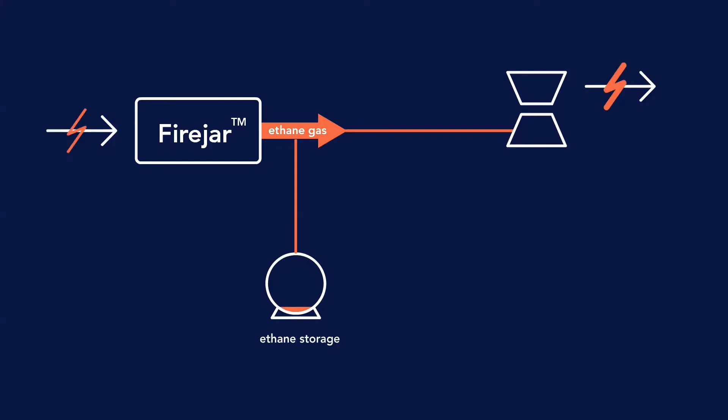The GridThink Firejar Development Center in Cheyenne, Wyoming is a state-of-the-art engineering facility fully equipped for P2G pilot process development. Conventional energy storage systems are episodic in nature; when a battery gets full, it must be discharged before any additional energy can be stored. Our Firejar process stores electricity in the chemical energy of ethane gas, allowing storage and recovery to occur independently and without the capacity limitations of conventional methods. The ethane can be stored indefinitely and is also useful for mobility and heating applications.

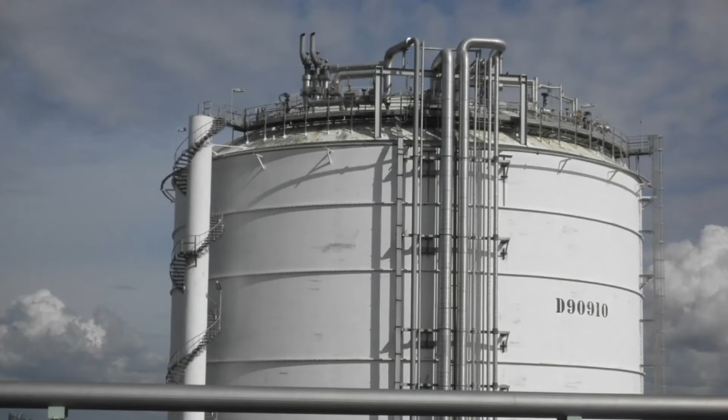Storing ethane is easier than storing natural gas. No cryogenic handling is needed with ethane gas, which is easily liquefied at room temperature at 50 bar. Ethane handling and storage equipment is readily available. Stored energy is recovered as electric power by burning ethane in combined cycle turbines. Firejar technology offers unmatched round-trip efficiency, achieving over

150%. Energy stored in ethane is versatile and can be used as a fuel for land and marine transportation. Ethane can also be used as a heating gas, either alone or mixed with natural gas. Ethane is a perfect P2G product, with 1.8 times more volumetric energy density than natural gas.

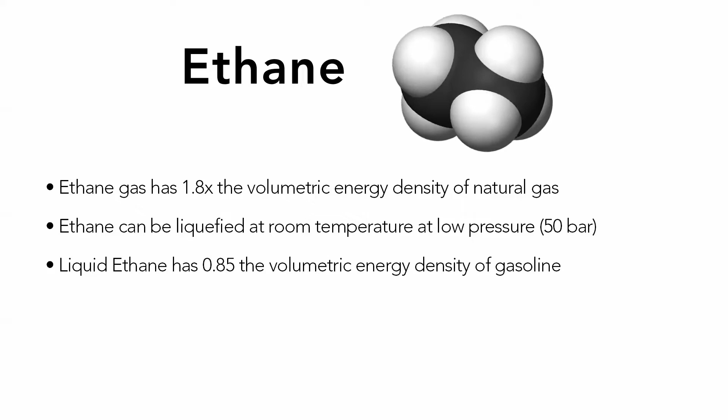Ethane is easy to liquefy and can be stored at room temperature at 50 bar pressure, with no need for cryogenic equipment. Liquid ethane has 85% of the volumetric energy density of gasoline. By using ethane, the Firejar P2G technology can provide over 150% round-trip efficiency for energy storage. Ethane provides a crossover to the chemicals industry because it is an important feedstock for industrial chemicals such as ethylene.

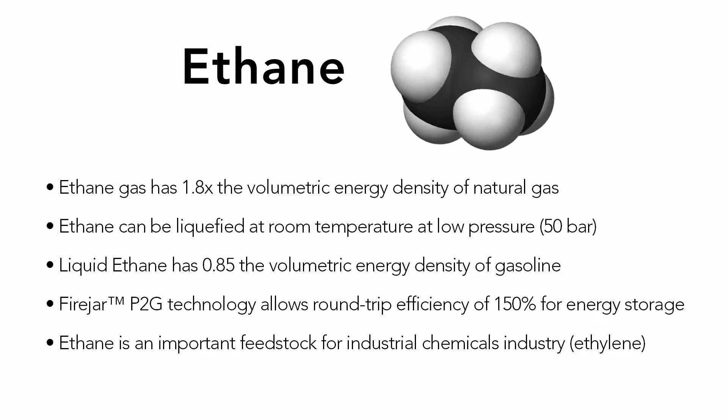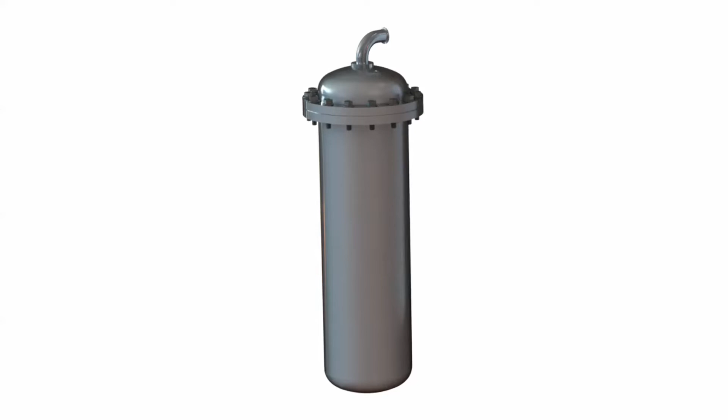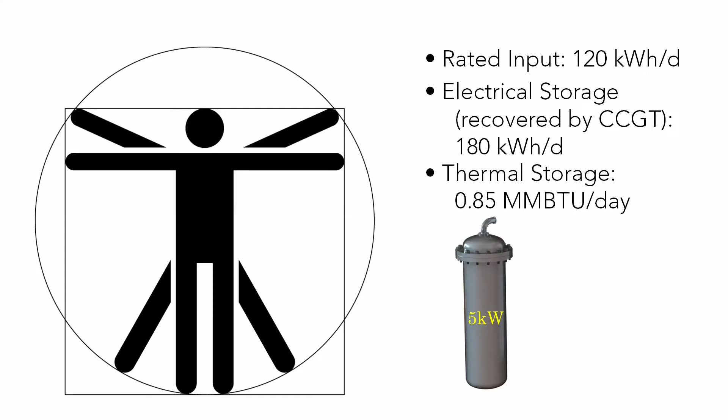The GridThink Firejar P2G technology uses modules rated according to nominal power input. GTI's current Firejar module is rated at 5 kilowatts, and many modules can be used together. This module is compact and easily handled. Each 5 kilowatt Firejar module can store at least 0.85 MMBTU per day in the form of ethane gas. GridThink is currently designing a larger 50 kilowatt module that will be able to store at least 8.5 MMBTU per day as ethane gas.

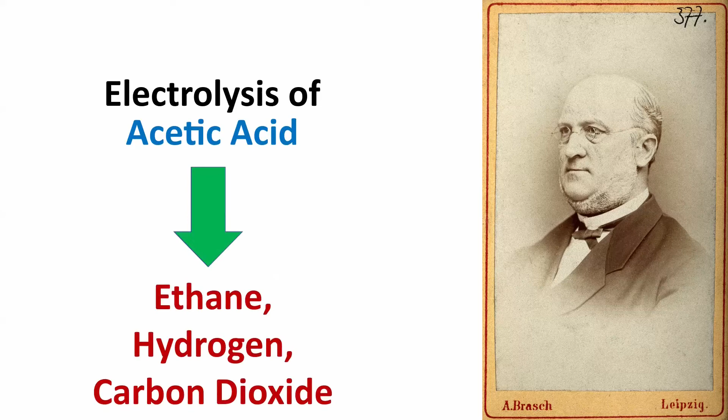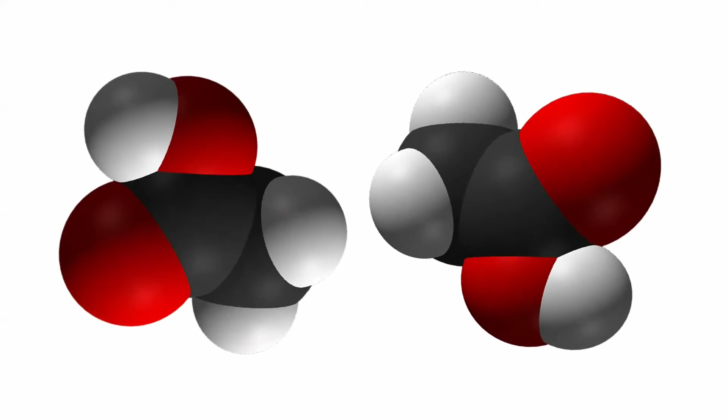The electrochemical production of ethane was first observed in 1834 by Michael Faraday, who used potassium acetate and a battery. The electrochemistry was more thoroughly studied by Hermann Kolbe starting in 1849. Kolbe was able to use acetic acid to produce ethane, and this electrochemical process is named after him. Acetic acid is a common industrial chemical. In the Kolbe reaction, 2 acetic acid molecules are electrochemically transformed into ethane, hydrogen, and 2 molecules of carbon dioxide.

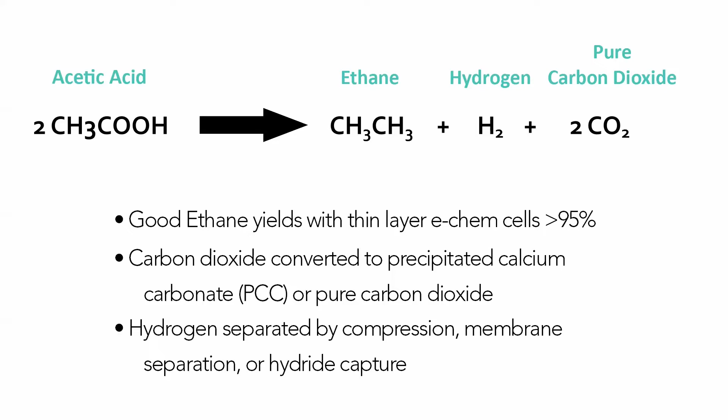The yields of ethane are very high, usually over 95%. Carbon dioxide can be captured as a high-value chemical product called PCC, or as a pure gas. Hydrogen is separated in most cases by normal methods and can be used as a fuel or sold as an industrial chemical. Existing power-to-gas technologies suffer from low efficiency, as much of the energy is lost before gas ever reaches the turbine.

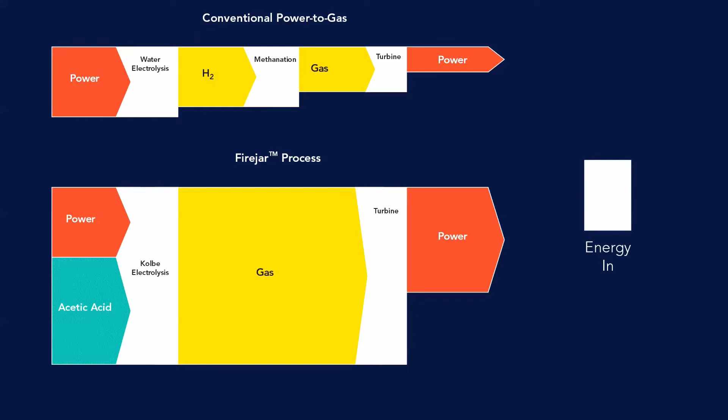The Firejar process works by using chemical energy to enhance the incoming electrical energy. The result is that instead of returning just one third of the stored energy, we amplify it and return 150%.

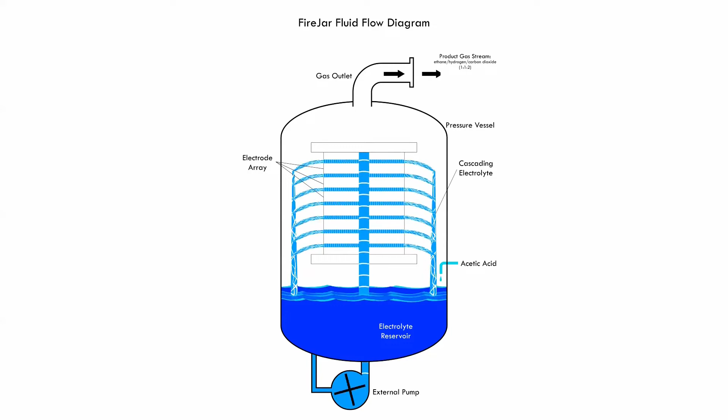GridThink Firejar technology uses an array of electrodes inside a pressure vessel to allow high power operation. Electrolyte containing acetic acid is recirculated from a reservoir over the electrode array, where it is converted into product gases and cascades back into the reservoir. The product gases collect in the headspace of the reactor vessel and leave through a pipe as a product gas stream containing ethane, hydrogen, and carbon dioxide. The process is continuous, with more acetic acid being added as it is consumed.

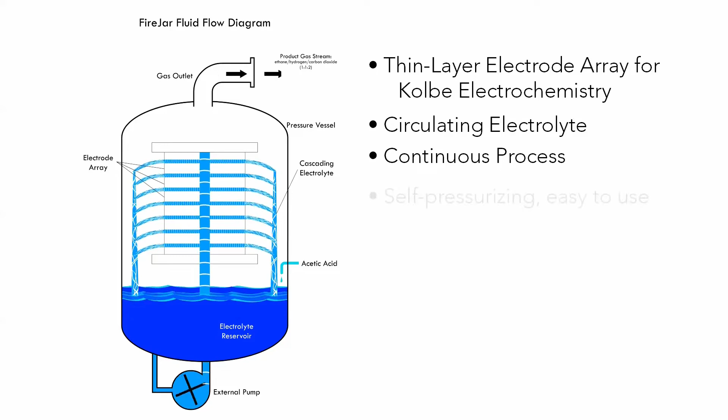The product gas stream is treated by an external physical plant. The Firejar can operate under pressure depending on the requirements of the external physical plant. For example, if a Benfield process is used to remove carbon dioxide, the best operating pressure is 20 bar.

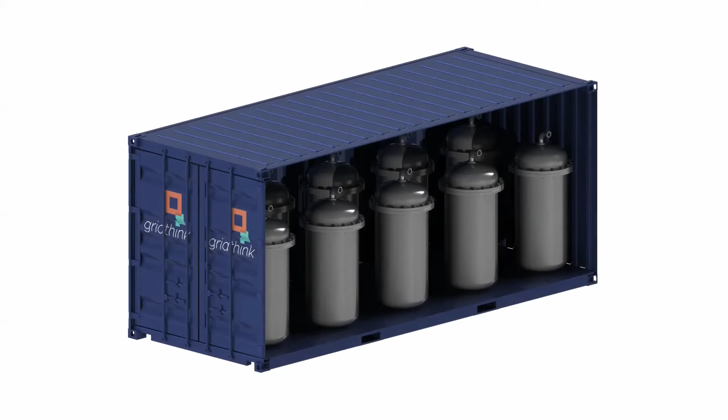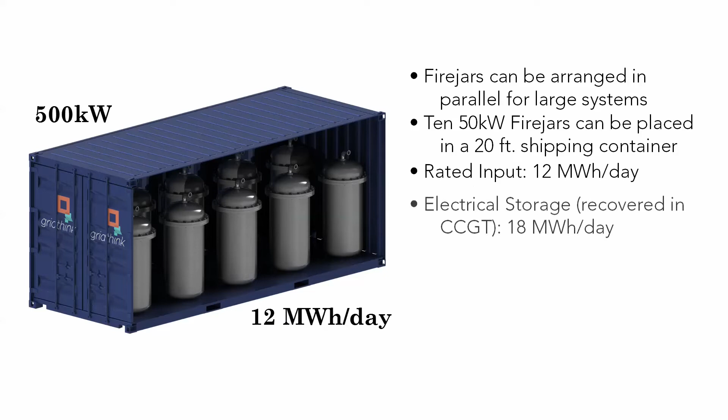Because the Firejar equipment is modular, it can be housed in convenient formats such as shipping containers. A 20-foot shipping container will hold 10 50-kilowatt Firejar modules, with a nominal electric power rating of 500 kilowatts. This shipping container can process 12 megawatt hours of electrical energy per day, producing 85 MMBTU of ethane per day.

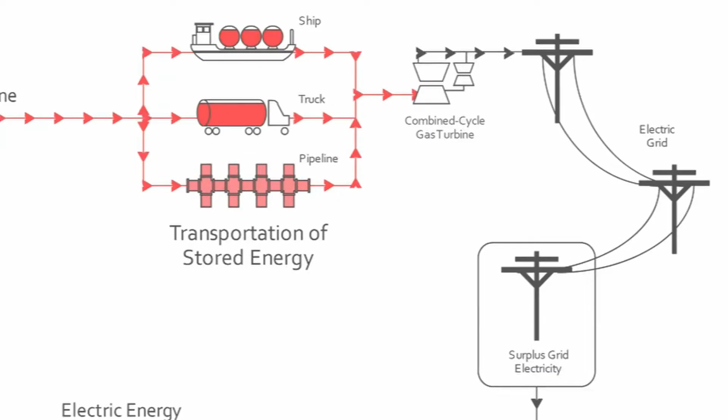GridThink's FireJar is the centerpiece of an economic ecosystem that coherently links several different markets and supply chains together. Elements of this ecosystem include transportation and distribution, renewables integration, chemicals production, and a supply chain that eliminates the need for imported carbon sources. Ethane produced by the FireJar is easily stored because it liquefies at room temperature.

Ethane can be transported as a gas or liquid in pipelines. Stored energy in liquid ethane also can be transported by ship and marine transport, by tank truck or ISO container, or by tank cars on trains.

Once the energy stored in ethane gas reaches its final destination, it can be recovered as heat or burned in a combined cycle turbine with 150% round-trip efficiency.

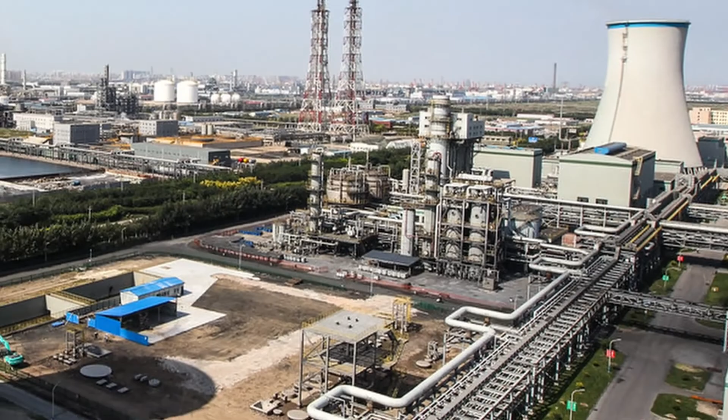The FireJar process is very clean. There are no NOx or SOx pollutants nor particulates produced. Recovering the stored energy by burning ethane is also a very clean process, producing only carbon dioxide and water.

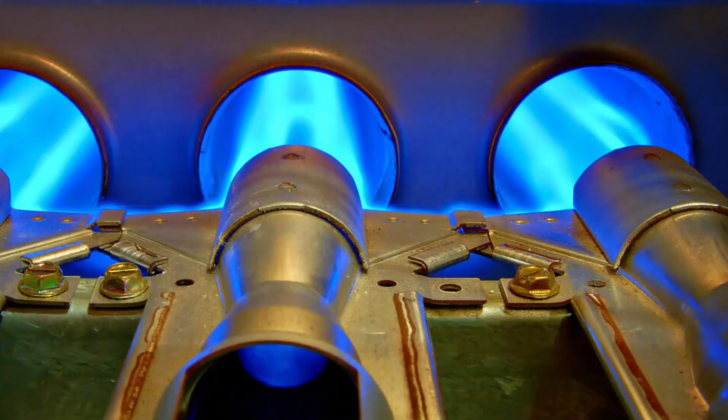FireJar is a green technology that can become key to reducing the pollutants that are common in areas where coal is used extensively for heating.

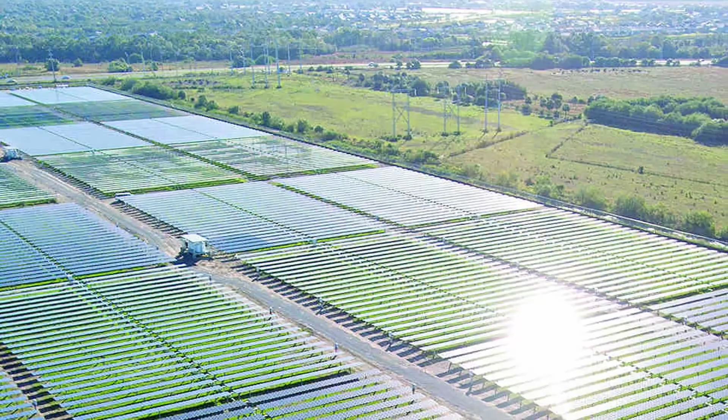Energy storage is also critical for integration of green renewable power from solar, wind, or hydroelectric assets into the power grid. GridThink has the ability to link the chemicals business with energy storage using P2C.

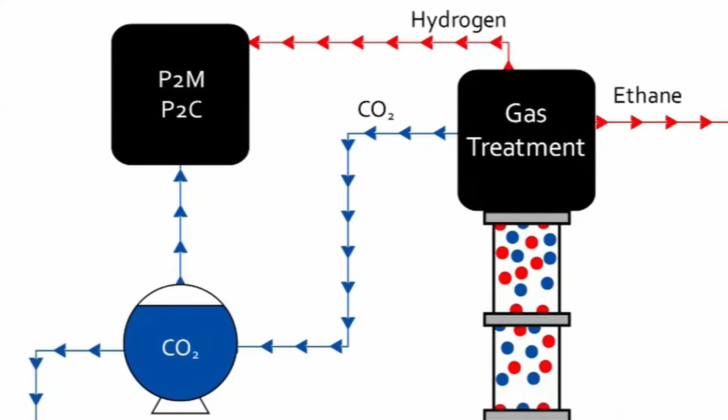Ethane, hydrogen, and carbon dioxide are all important feedstocks for the chemicals industry. Hydrogen is used in many important chemical processes and in refining. Ethane is often converted to ethylene and used to produce plastics.

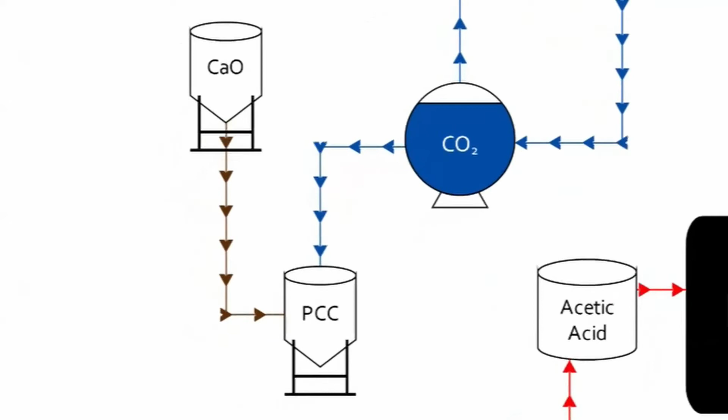Carbon dioxide has particular value for creating precipitated calcium carbonate, usually called PCC. PCC is used in a wide range of consumer products, from toilet paper to cosmetics.

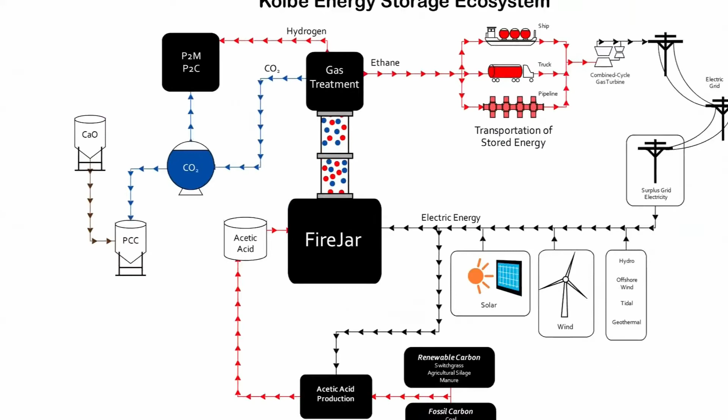The supply chain for acetic acid is an essential piece of the FireJar ecosystem. Acetic acid is a common industrial chemical that can be made from a wide variety of carbon feedstock sources.

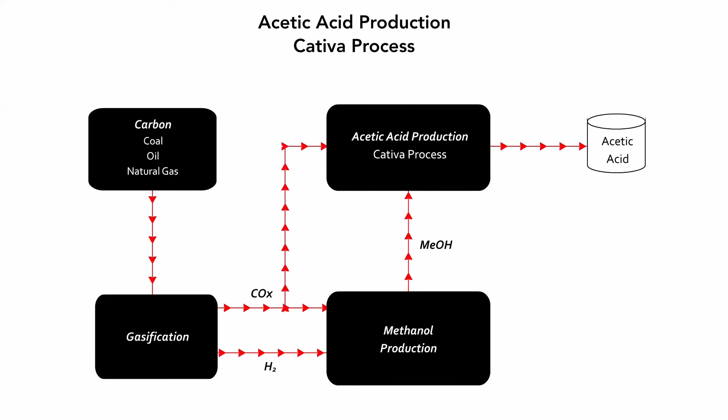Almost all acetic acid is currently made using a Cativa process from methanol and carbon monoxide. Syngas is used to produce the methanol and carbon monoxide feedstocks.

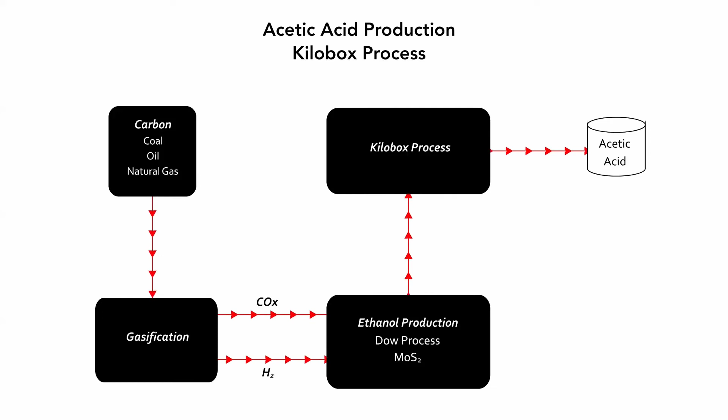GridThink has a process for making acetic acid that is more cost-effective than the Cativa process. This process is called Kilobox and uses wet ethanol as feedstock. Ethanol for Kilobox can be produced from syngas or fermentation.

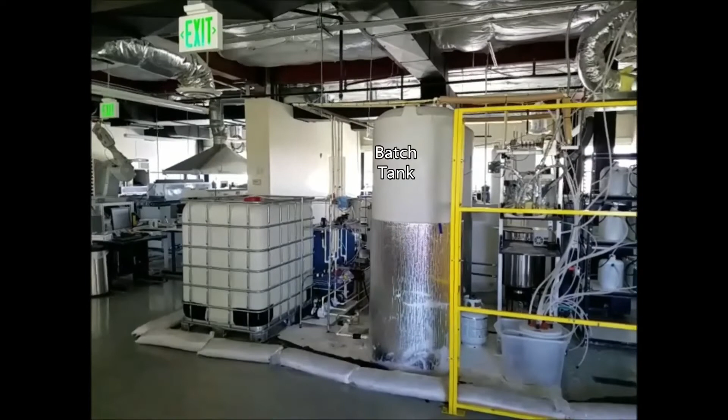The Kilobox process is based on a direct alcohol fuel cell and has been demonstrated at a pilot scale. The Kilobox process also requires carbon dioxide and makes large amounts of PCC as a valuable byproduct.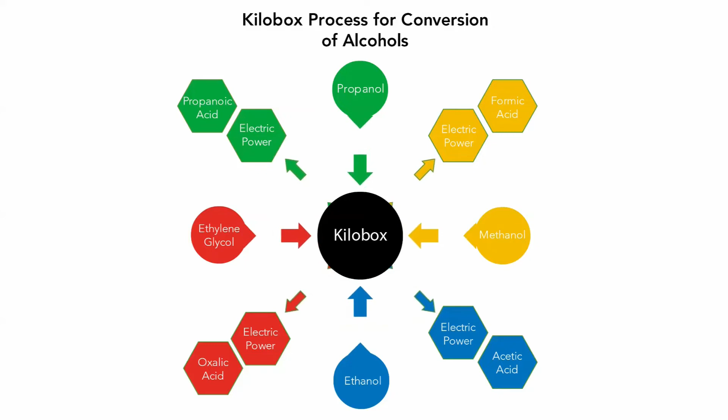Kilobox can convert different alcohols into the corresponding carboxylic acids. As a result, other valuable chemical products can be obtained from the same Kilobox plant that is used to produce acetic acid. Both methanol and ethanol feedstocks for acetic acid production can be made from syngas.

Syngas for this application can be made from coal, agricultural silage, processed sewage, municipal solid waste, and many other carbon sources. As a result, imported carbon sources, such as natural gas, are not required for the FireJar process.

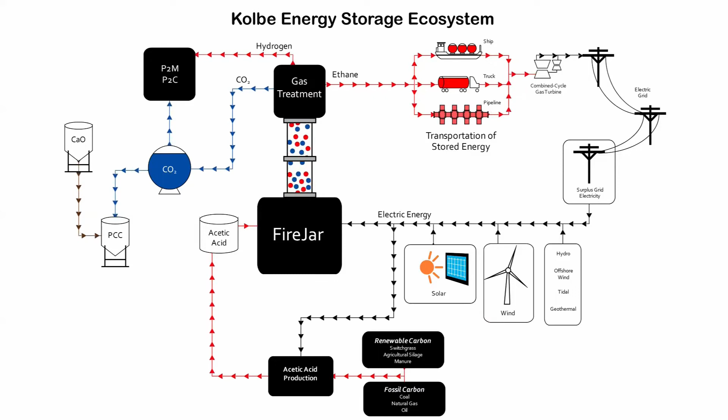Because the FireJar P2G process links the chemical and energy storage industries, a positive feedback loop can be established in which the acetic acid cost goes down as the demand for FireJar goes up.

The virtuous cycle begins when lower costs for energy storage using the FireJar process increase the demand for energy storage. This increased demand for energy storage, in turn, increases demand for acetic acid.

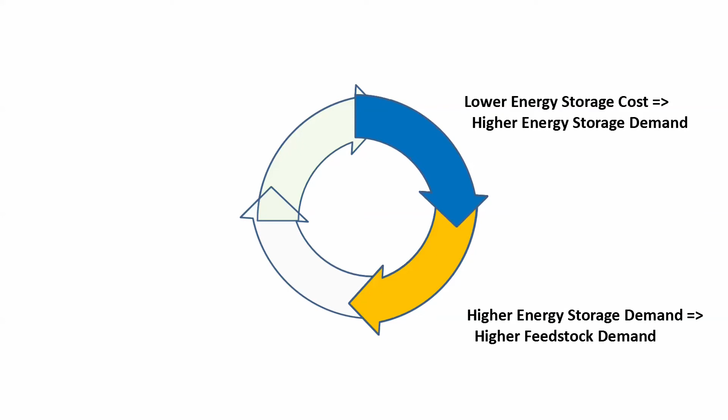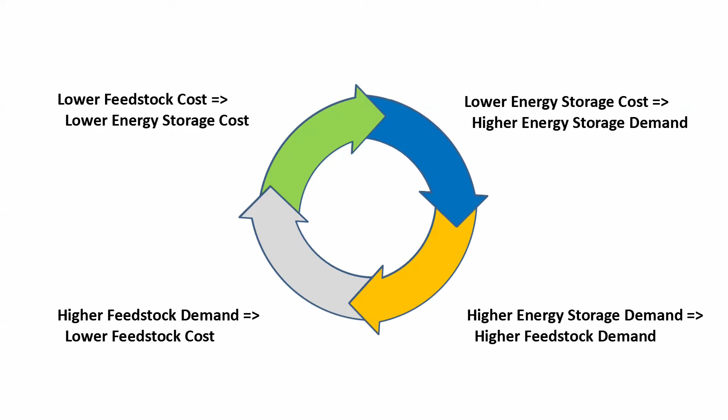Increased demand for acetic acid increases production of acetic acid and lowers the cost. Lower acetic acid cost increases demand for energy storage, and the virtuous cycle continues.

Over time, the virtuous cycle acts to drive up acetic acid production and drive down the cost of acetic acid as demand for energy storage grows.

A virtuous cycle between two previously unconnected markets can push open new markets much larger than each individual market by exponentially increasing demand. In this case, both the chemicals market and the energy storage market are large billion-dollar markets.

However, combination of the two markets by the FireJar P2G process creates a synergy that results in a new market which is much larger than the chemicals and energy storage markets combined. It is estimated that the size of this market in the United States is approximately $300 billion.

The large markets for FireJar energy storage arise from the ability of P2G to scale into the terawatt-hour range and to provide energy storage for a very wide range of durations, including deep seasonal storage.

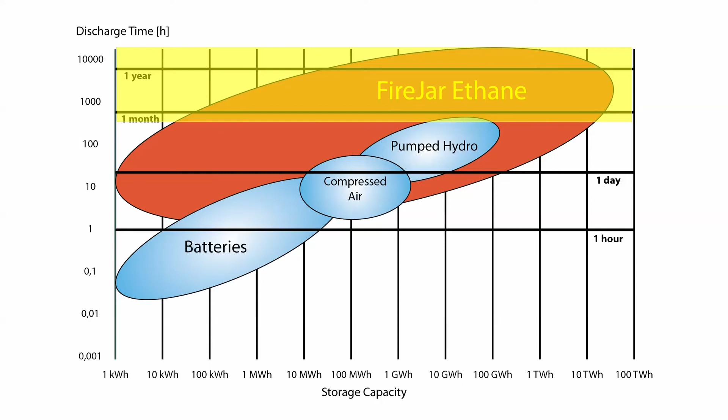Some of these markets are cost sensitive, and the virtuous cycle between FireJar and the supply chain is a key capability to capture cost sensitive markets and drive growth.

GridThink seeks to build one or more pilot-scale demonstration facilities that can produce 550 cubic meters of ethane per day. A pilot facility of this size will require 40 5-kilowatt FireJars and a nominal input power of 200 kilowatts.

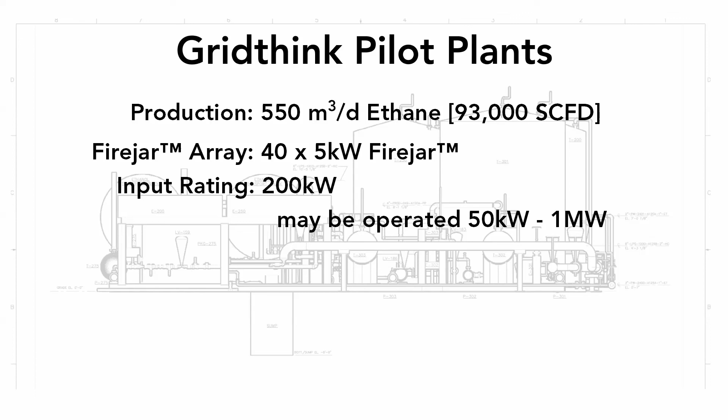This FireJar facility can operate well outside its normal power range and will support input power levels between 50 kilowatts and 1 megawatt. Post-processing operations for the P2G product will be selected by the customer.

GridThink will achieve low-rate initial production of FireJars during the pilot plant phase and will design manufacturing processes that allow full-rate production in the future.